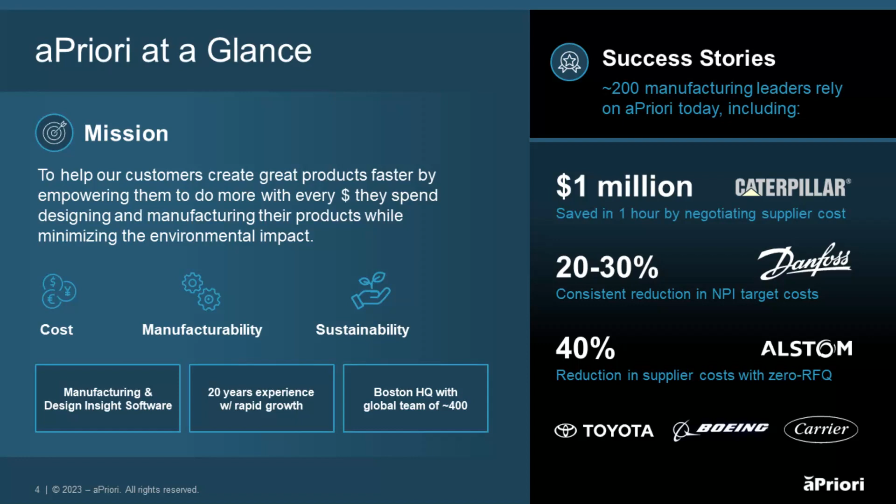We've got some great success stories. Over 200 of the leaders in manufacturing rely on aPriori today. Some examples on the screen: Caterpillar managed to save over $1 million in 1 hour. Danfoss saved 20 to 30% consistently with new product introduction target costs. Alstom managed to save 40% through reduction in supplier costs through their zero RFQ initiative. And many other customers from many other industries also rely on aPriori today. You can see we really do support all industries, and we've got some really big name customers in each industry that rely on aPriori to accelerate their business globally.

So what are the challenges? What are the priorities in industrial manufacturing today? Well, inflation and margin pressure—more recently that's been a hot topic. That's something that you can definitely help with aPriori. Mitigating supply chain risk with lots of disruption over the last couple of years—that's something that we can definitely address. Labor and skills gaps, that's always been a challenge in the engineering and manufacturing space, probably for the last 10 plus years. A lot of people are coming out of school and university ill-equipped for what's needed in the industry. And more recently, driving sustainability action. A lot of companies have made promises, but getting to that action is definitely a challenge.

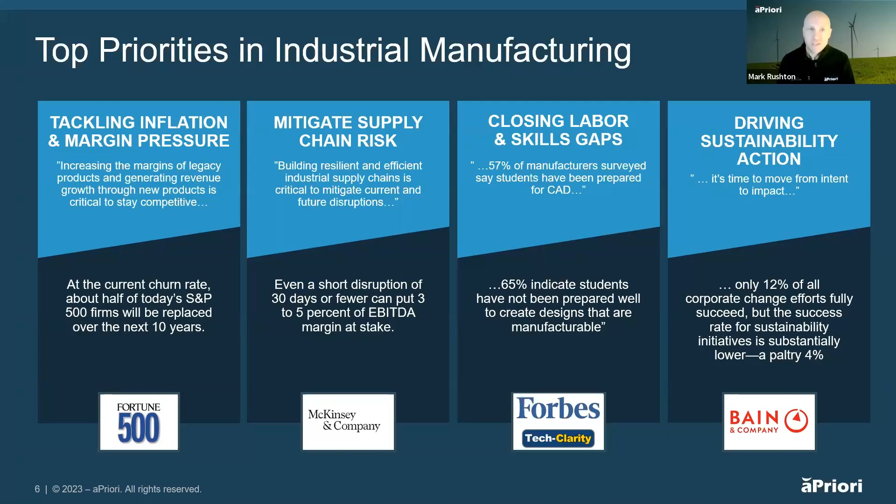So how do we help with that? Well, all of the investments that you've already made in things like 3D CAD and PLM, we leverage those. We leverage the value that's locked away inside your digital twin by adding to it and giving you a continuous digital thread. Many companies focus on the digital twin of the product, which is great, but we extend that by giving you a digital twin of the process and also of the factory. And we enable the insights trapped within that to be unlocked around cost, manufacturing, manufacturability, and now cost and CO₂.

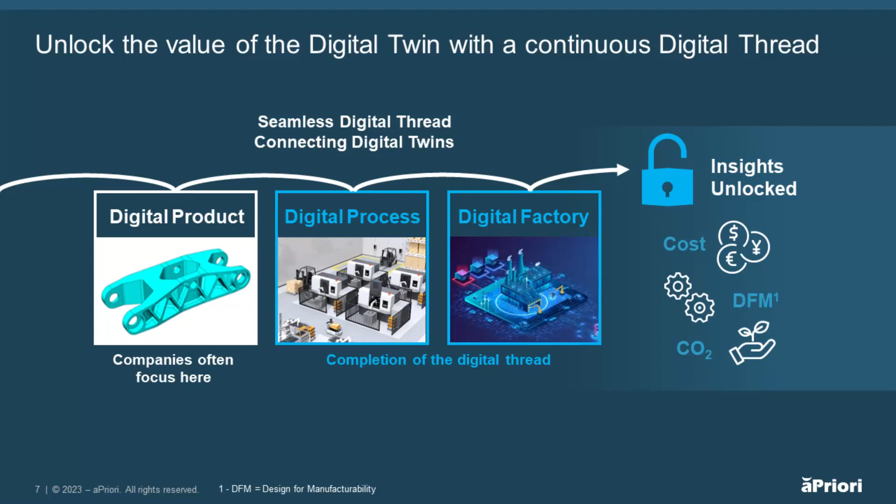So moving sustainability from intent to impact. Customers are demanding more sustainable products, and what's lacking is transparent data to prove it, to avoid greenwashing. There's immense pressure from new legislation and regulations like the EU taxonomy, and in the US, the proposals from the SEC. Even more recently, the carbon tax on imports proposed in the EU. The only other way to really do it is with complex, time-consuming and expensive full life cycle assessments. So we're here to help with all of these things.

Manufacturing companies have a huge impact on the world's energy consumption and global emissions. It's a big area where we can have a huge impact by driving efficiency and using our technology. Many companies, in some sectors 100%, have some sort of sustainability strategy defined. They've made promises publicly, but only 40% believe they actually have the knowledge and capabilities to achieve their targets, and we help bridge that gap.

We've been providing the ability to act on cost and manufacturability for over 20 years, so we really know product development and manufacturing very well. We're simply layering on top the ability to act on sustainability by taking what we know about manufacturing and allowing measurement of the carbon footprint of materials and processes used in the products our customers design and build. And with that, I'm going to hand over to Gibson to talk about how we do that for sustainability.

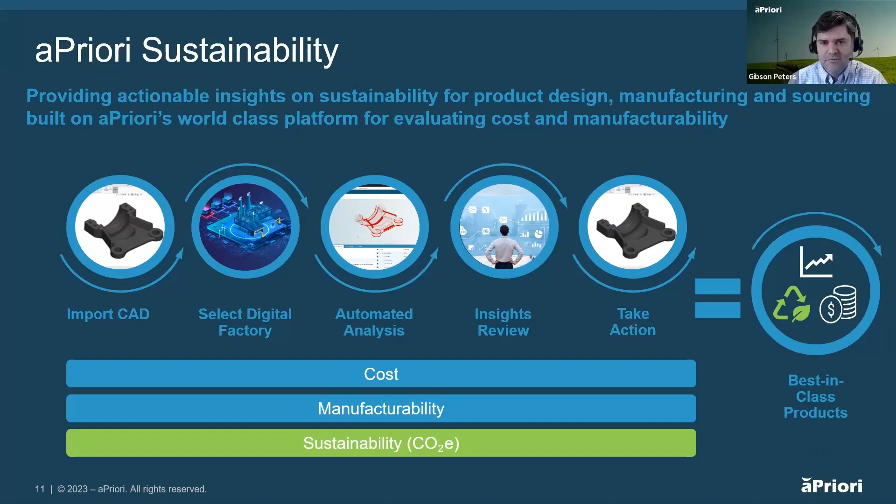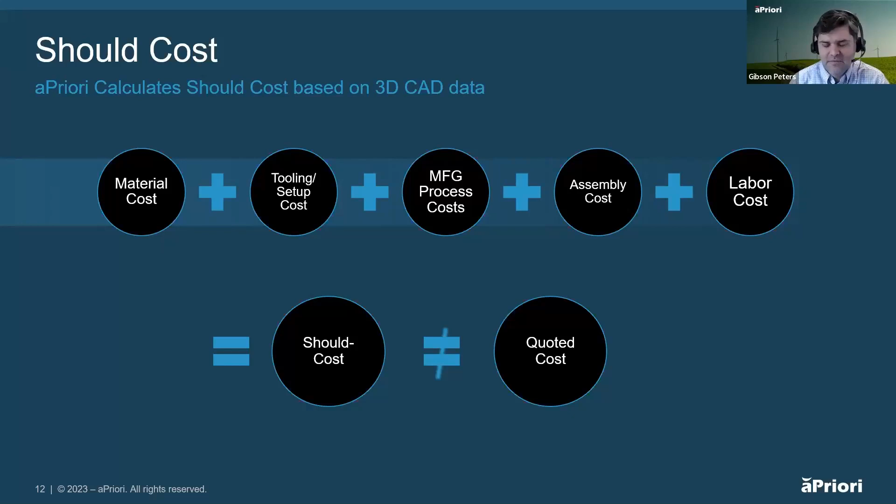For those not familiar, aPriori really focuses on should costing. We take the material costs, tooling setup, manufacturing process, assembly costs, and labor costs, and help determine a should cost, which is slightly different than a quote cost - should costing, as it sounds, is how much a product should cost to make. This really fits nicely into the demands of what sustainability is asking from our customers.

So for material costs, we understand rough mass, regrind, remelt, and utilization. We multiply that by the material CO2 factor to help you get a material CO2 calculation for your product. When it comes to the manufacturing process, we've spent a lot of time understanding the cycle time of many different products and processes - over 440 different processes developed - understanding the energy use for different machines, then layering on the electricity mix factor to multiply by the energy used to come up with a process CO2.

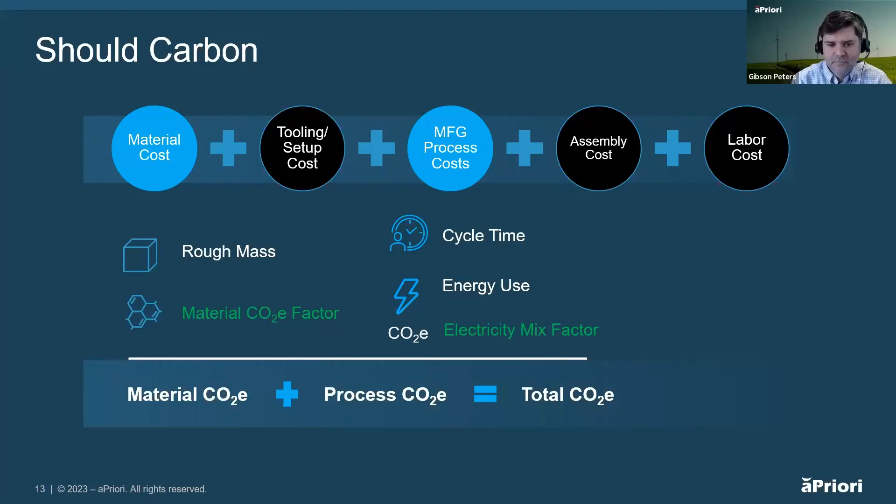What we found throughout our process is there's four main layers. What is the shape and geometry of the product? What is it made out of - the material? How it's made - the manufacturing process. And where it's made - the location, electricity mix. I think more and more as we dive into this and learn about sustainability and how we make products more sustainable and design them to be more sustainable, these are really dependent on each other.

So if I change the geometry and the shape, I can look at changing the material, look at changing the manufacturing process. So understanding how these different variables are dependent on each other is really important to understanding both the cost and sustainability impact, and helping you optimize for both cost and sustainability.

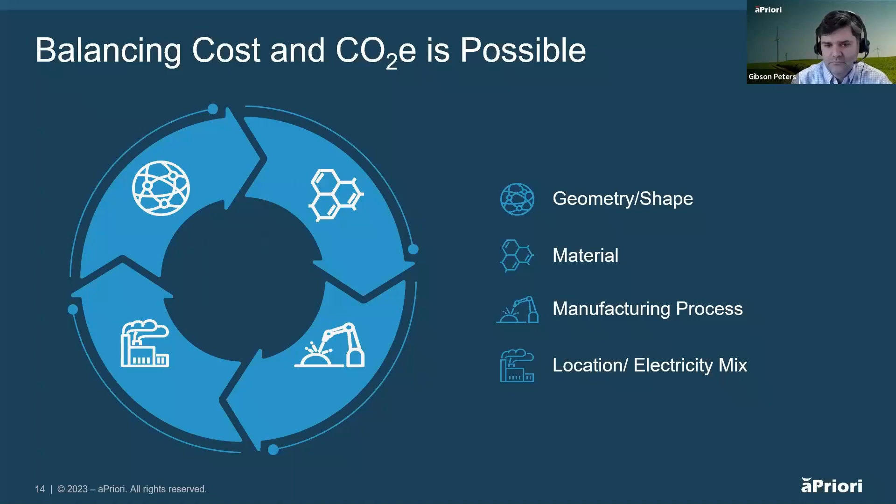Just to give an overview of what some of our customers are doing - working with a global truck manufacturer, they're helping, I think everybody starts with creating that baseline of existing products: how much carbon is in my existing products? Then looking for ways to reduce the CO2 in their products. This customer is looking at reducing CO2 by switching from metal components to plastic components, and it's the first solution they've really seen that can help them meet their ambitious CO2 goals.

Another customer of ours is also looking to automate the creation of CO2 baselines with existing products, equipping their design teams with insights when they start talking about circularity design or how to make products more sustainable. Finally, we're working with a manufacturer of aluminum products, and they're using aPriori as a sales tool to help customers understand the carbon impacts of using recycled material or materials with a lower carbon footprint. There's a lot of different ways we've seen customers utilize our product, and it's really exciting to see ways we initially thought of and our customers running with the insights we're able to provide.

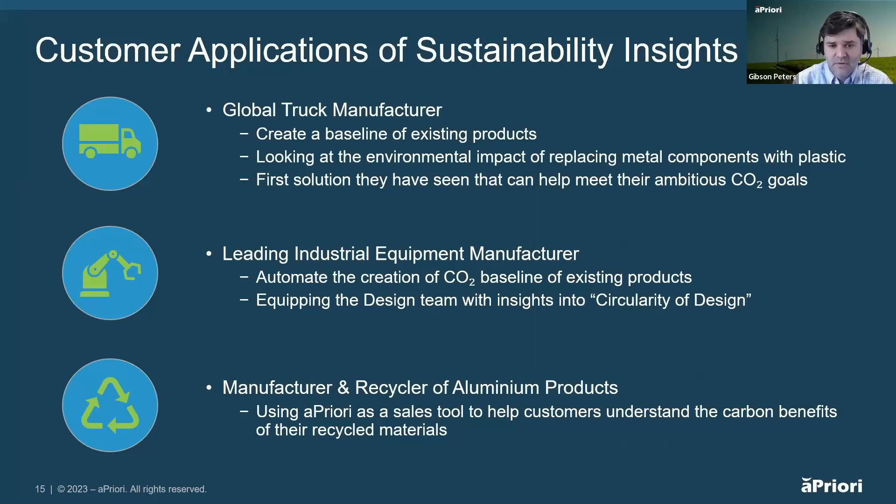And then finally, what we wanted to talk about is earlier this month, we had a chance to catch up with Tony Rasmussen, Global Manager of Cost and Value for Grundfos.

So let's walk through a live demonstration now. What I'll do is we'll go through and evaluate an injection molded design. I'll evaluate that in aPriori, and we're going to assess alternative suppliers, consider different materials, and compare design iterations as well. So when we evaluate a design, we're going to look at manufacturability, cost, and sustainability in parallel. Let's switch over to aPriori now.

Now that we're in aPriori, there are only a few main inputs for running an analysis, whether it's sustainability, cost, or manufacturability. Here we've pointed to the CAD file we'd like to evaluate. We need to just answer those 4 basic questions you may be familiar with. What's your primary method of manufacturing?

In this case, plastic molding. Where would you like to manufacture this? We're going to look at this in the USA. What material and what annual volume? At this point, aPriori will run through an analysis based off of those 4 primary inputs.

We also have the ability, as usual, to see manufacturing issues, whether it's draft angle issues, whether it's hole proximity, whether it's minimum wall thickness. All of this remains the same, whether we're running an analysis looking at cost, sustainability, or manufacturability.

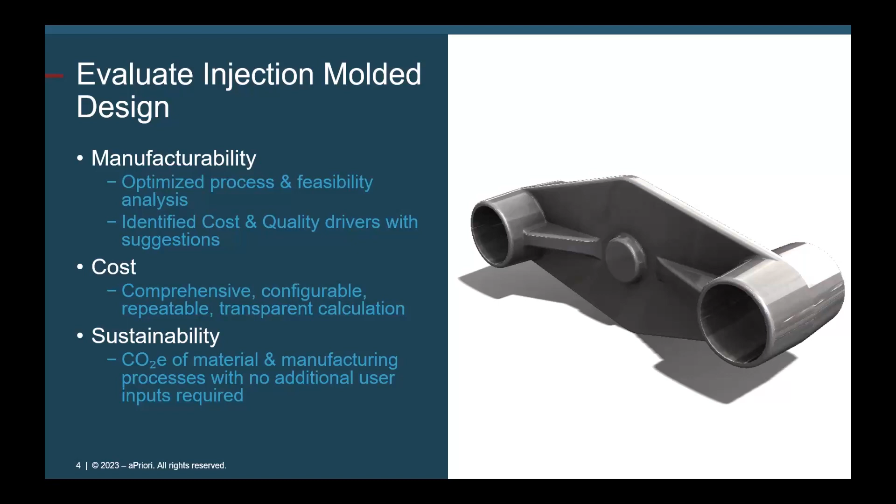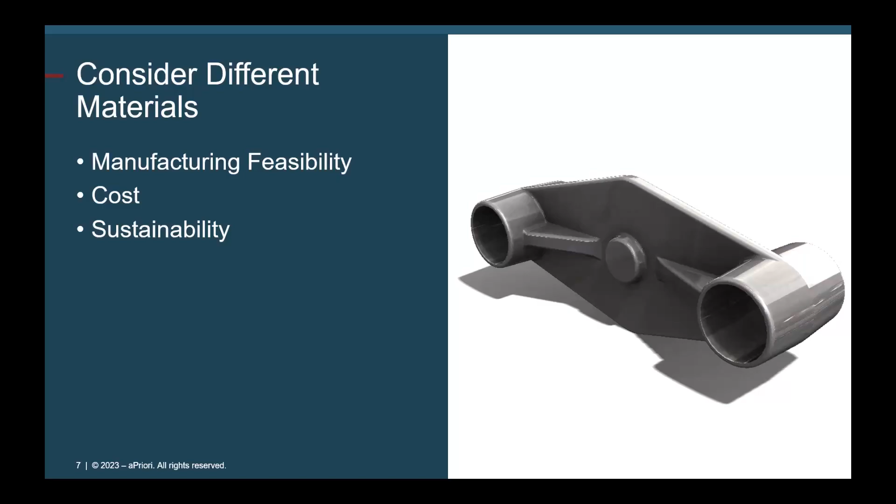So now let's go through and look at different materials and see what that does to manufacturing feasibility, cost, and sustainability. Let's come over to our sustainability guidance and look at our material. Here we can see in the US right now, about 60% of our overall CO2 is coming from that material, about 40% is coming from the processing. So let's go through and actually look at some different materials.

So we have it costed with ABS currently. Let's open it up and look at all materials. Now we have the ability to sort based off of the carbon of the material, the emissions factor, as well as the cost per volume. So we can actually go through and really understand what would give us a reduction in carbon. Sorting from that lowest carbon to the top, we have that ability to see what's the emissions factor of those different materials. Here we're looking at our ABS, we're at 0.47 for carbon. We have the ability to sort and see what those different materials are.

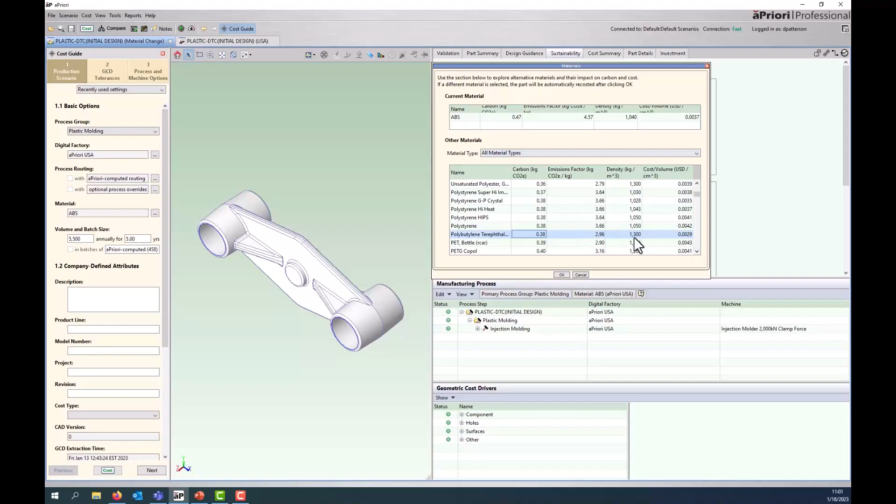So let's find a similar material. For example, here we have a PBT material. It's going to be a similar density, a little bit higher. The cost per volume is going to be a little bit lower. Let's run it with this PBT material and see what that does to our overall carbon. So we were at 1.01 kilograms of carbon. Let's rerun that and see what that does.

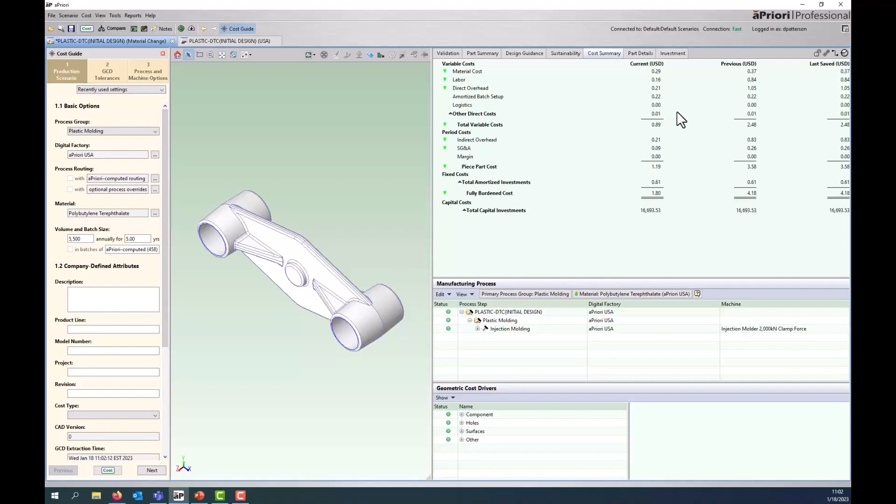So moving to that PBT material had a large reduction in the overall total carbon. We went from 1.01 to 0.58, so almost cut the carbon in half. But let's come over and look at cost. And cost went the correct direction as well. We went from $4.18 down to $1.80. We had a reduction in material, labor, and overhead based off of this new material. So we'll do that bottoms-up analysis to understand the cycle time associated with processing that specific material.

So we've just touched on manufacturability, cost, and sustainability, looking at different materials. You can go through and cost a material individually, or you can tell aPriori to go off and cost the part with all of your materials and come back with that lowest cost feasible material, all the while calculating sustainability, so you can understand the impacts of material change on manufacturability, cost, and sustainability.

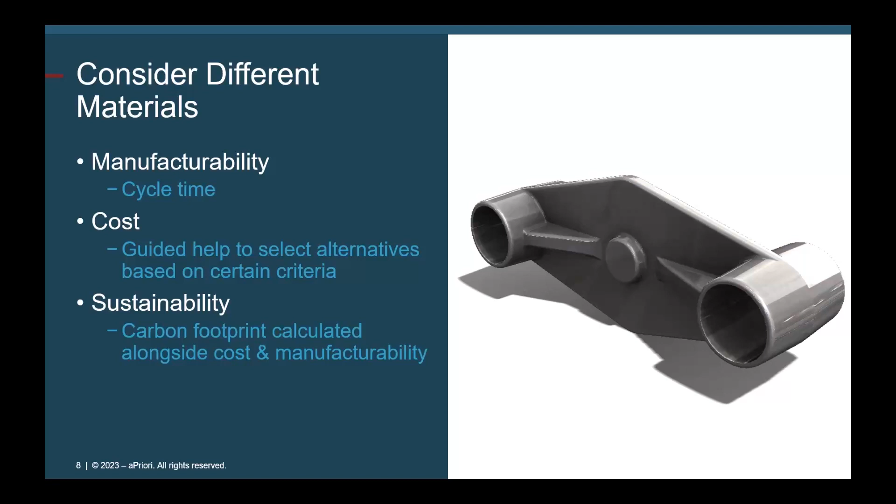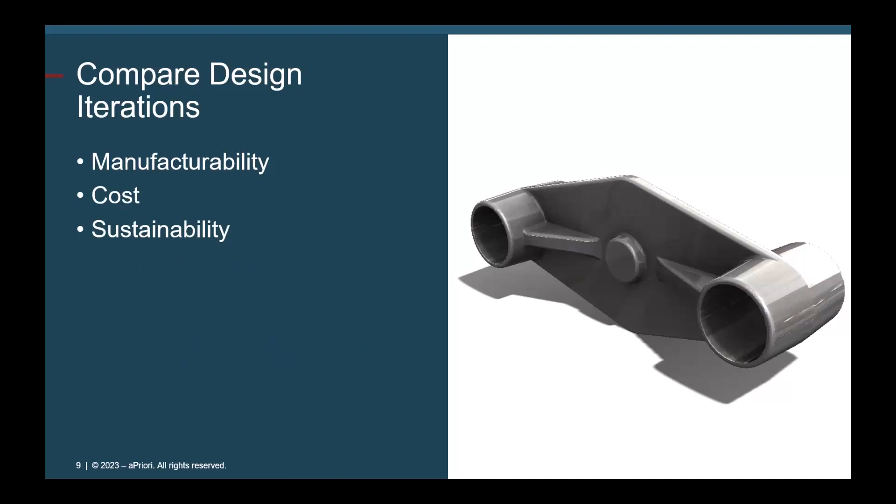So let's take this design now and do some iterations on the design itself so we can compare those different design iterations and look at manufacturability, cost, and sustainability for different versions of this design, leveraging the feedback from aPriori.

So let's dive back into our design and focus on understanding the manufacturability, cost, and sustainability by looking at some design iterations. Let's dive into our design guidance and look at our potential manufacturing issues.

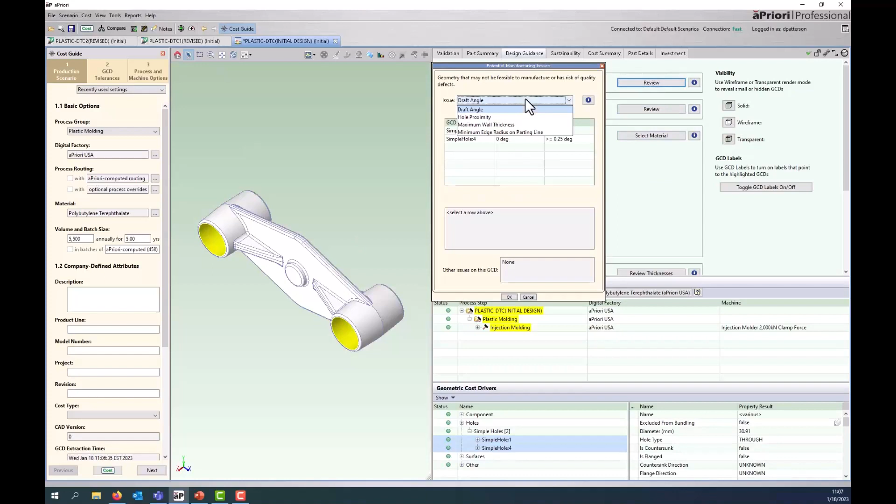If we come over here, we can see our list of potential manufacturing issues - draft angle issues, hole proximity - but let's focus on this maximum wall thickness. With this current design, we've calculated a maximum wall thickness of 16.5 millimeters, which is greater than the 3.1 recommended for this material.

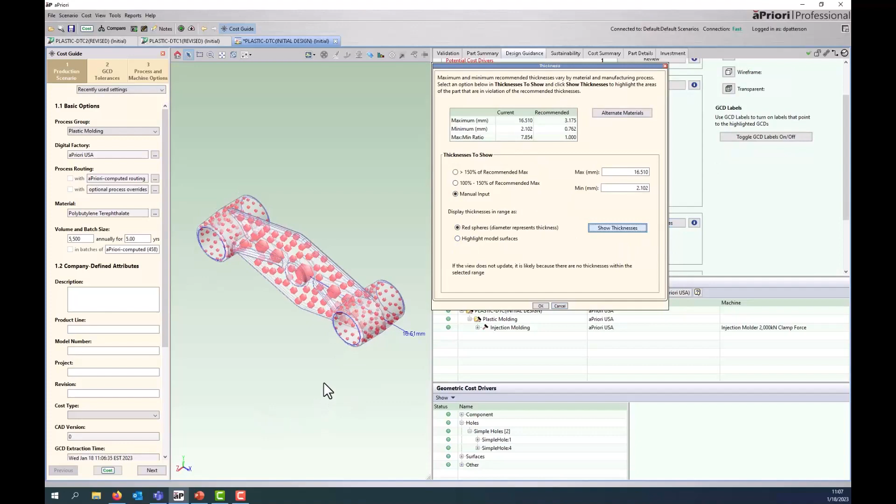Let's dive in and see specifically where on that model that material issue is. Let's go into our transparent mode, and we can highlight that specific area where there's a thickness violation. Right in the middle is our biggest thickness violation on that boss, as well as the ribs on the side having some thickness violations.

Let's fast forward and look at a different design version of this. Let's go through and remove some of that thickness and see what we can do for a different design here. So here I've got my revised design, taking that material and coring out some of the material in those thickest spots.

Let's see where we are cost-wise. Right now we're at $1.70 for this design with $24,000 of tooling. Let's look at where we are with our original - we were at $1.80 with about almost $17,000 of tooling. So we've reduced the cost a little bit.

Let's see what that does to our overall sustainability. Here we're at 0.58 kilograms of carbon for the original. Let's look at this with our revised design - 0.43, so we're moving the right direction.

That material wall thickness has a large implication on the cooling time of the design - the thicker the material, the longer it takes to cool. With our design, we've added some additional tooling to the part, resulting in 4 lifters for this cutout material. That's reflected in that tooling charge, the $24,000 instead of that $16,000.

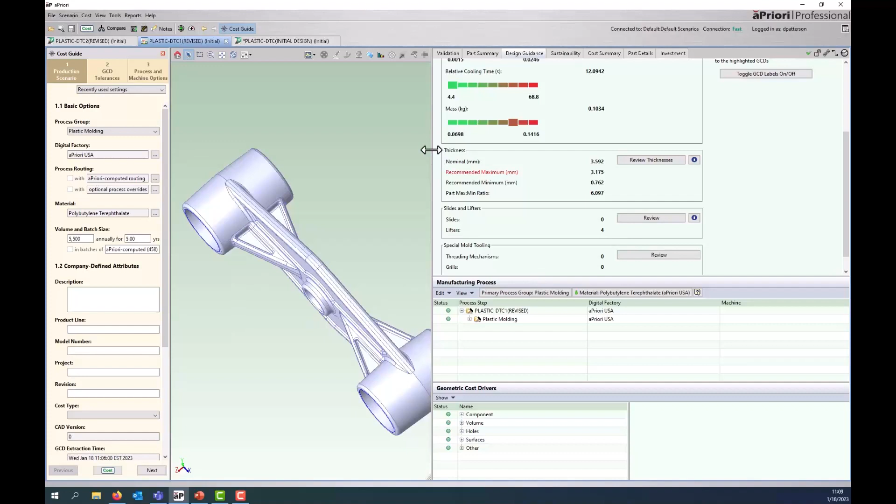Let's fast forward one more time and look at what would happen if we were to eliminate those side actions, going from 1 thick rib on each side to 2 thinner ribs, eliminating all that action.

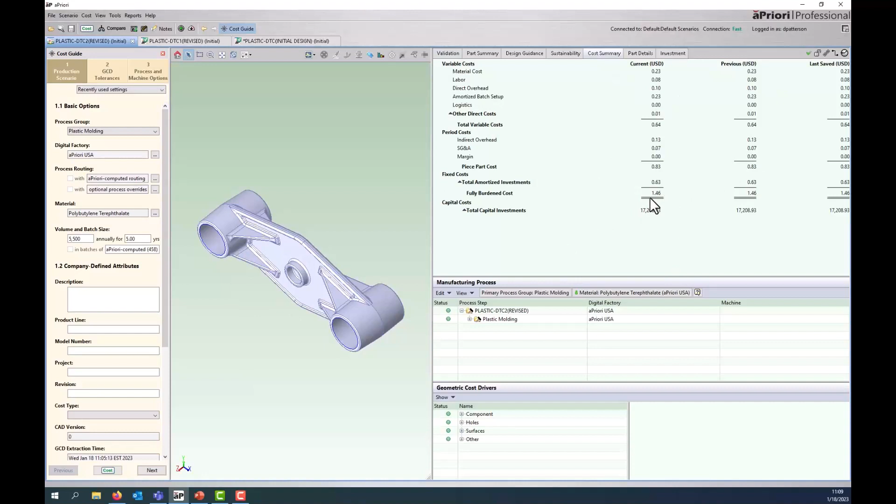Let's see where we are cost-wise. Right now we're moving the correct direction - we went from $1.80 to $1.70, now down to $1.46. We dropped our tooling charge closer to that original charge of $16,000.

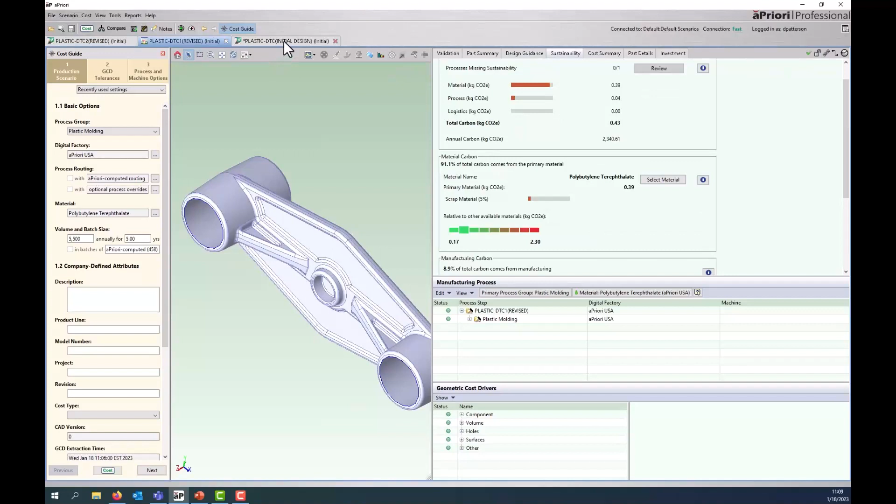Let's see where we are on sustainability. That moved the right direction as well, 0.38 kilograms of carbon overall. If we look back at that second design, it was 0.43, and then looking at the original, 0.58. So we've moved the correct direction by minimizing the thickness of the part based off of the design guidance.

So here we have the ability to optimize for manufacturability, cost, and sustainability in parallel. Based off of changing that design, we were able to reduce the cycle time, which led to a reduction in cost as well as a reduction in CO2. Reducing that material can have a very large impact on all three of these.

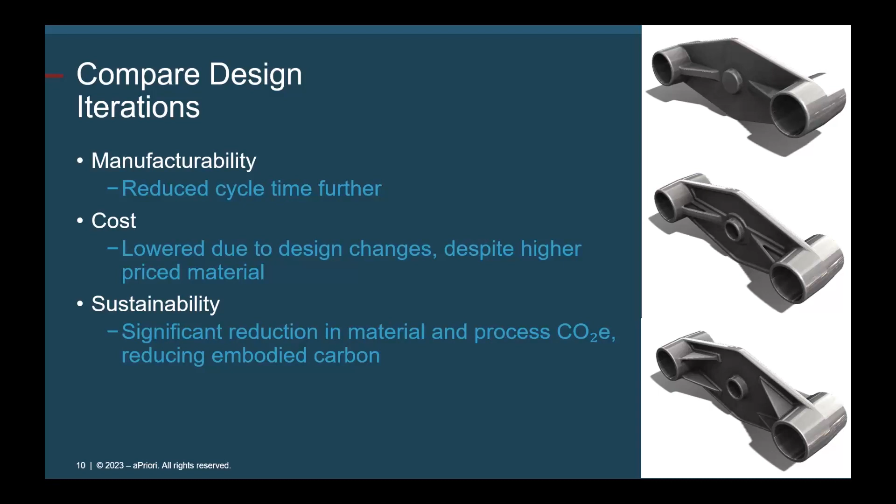In summary, we've evaluated an injection molded design. We've looked at potential quality issues, cost driving issues, as well as assessed alternative suppliers and alternative materials. We further refined our design by looking at design iterations to maximize the design based off of feedback from aPriori.

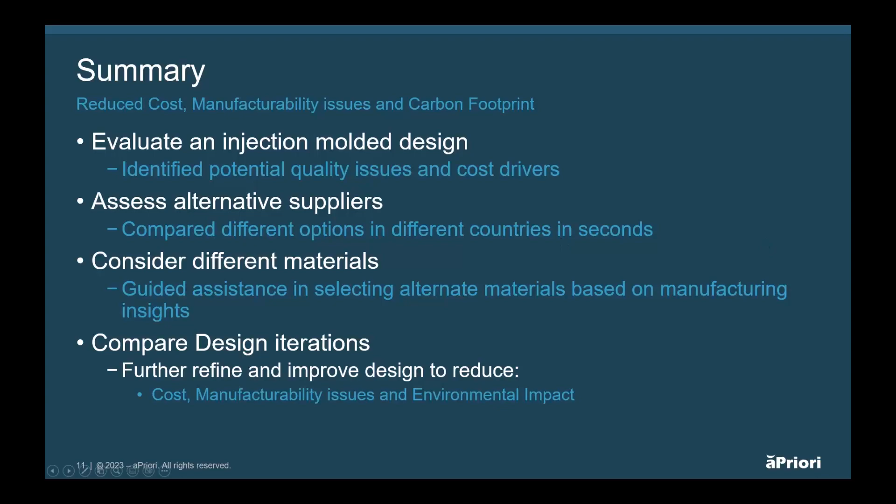Thanks, Daniel. Great job there. Really, really good overview of what's possible.

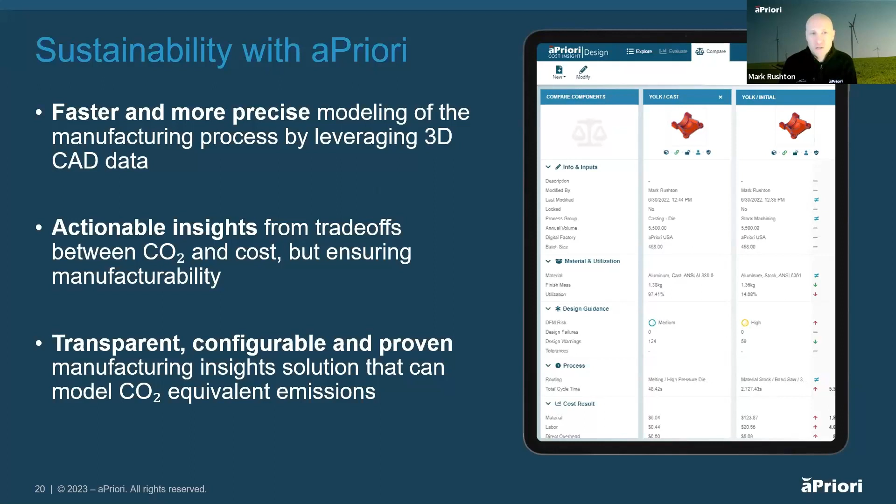Hopefully you saw from Gibson's overview of the product and Daniel's demonstration that sustainability with aPriori is really going to help you achieve your goals faster with more precise modeling of the manufacturing process by leveraging that 3D CAD data or digital twin. It goes beyond just baselining and reporting - it gives you actionable insights from being able to do trade-off analysis between cost and CO2 across different processes and designs. The key is really giving you transparent and configurable, proven manufacturing insights that leverage our knowledge of the manufacturing process and give you CO2 equivalent emissions from that process.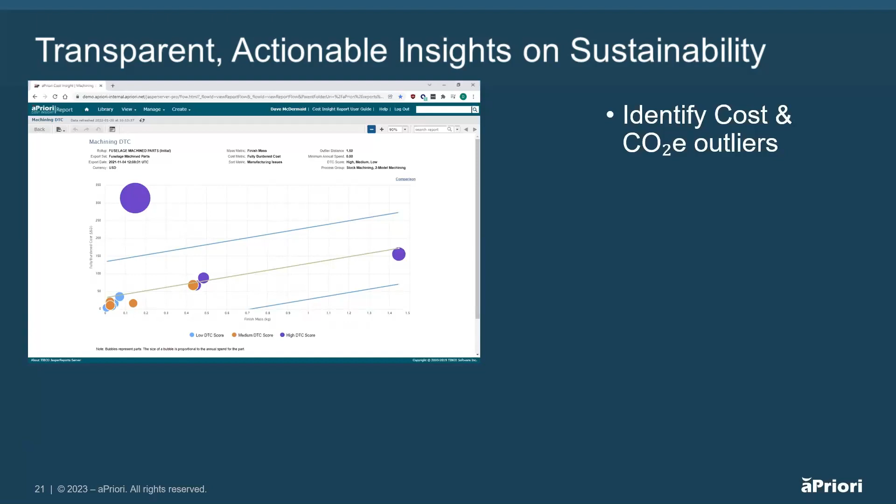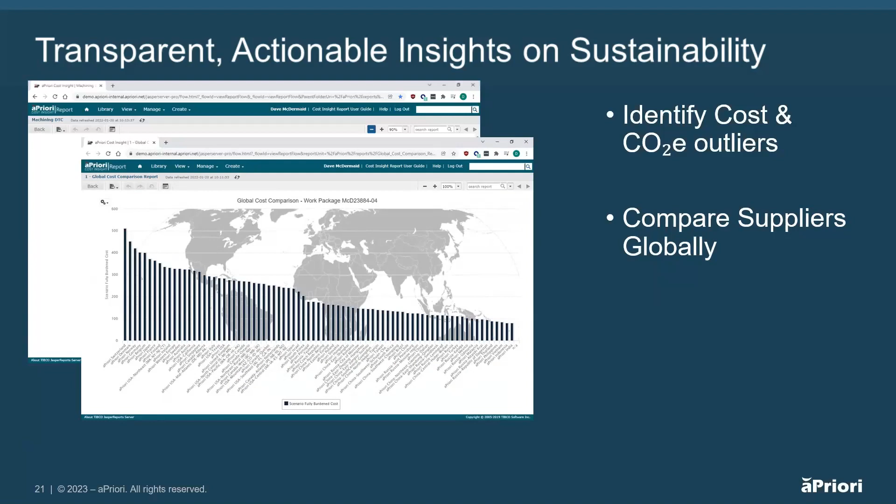As I mentioned, the transparent and actionable insights on sustainability can be used either interactively on component and assembly level, like Daniel showed in the demonstration, but using our analytics built into the platform, it can help you identify outliers for both cost and CO2 emissions. Not only cost varies based on where you're manufacturing globally, but also the CO2 emissions. And that's something you can look at a high level as well. But really the key is to enable access to carbon data at a product level, which is quite unique in this space.

So hopefully you can see how we can really help move you from intent to impact, and that as you saw with the interview with Tony and quotes from Tristan at Carrier, you can join others that are already leading the way. You can start to address how customers are demanding more sustainable products by providing transparent, precise carbon data and win more business from having that. You'll be able to get ahead of upcoming regulations and avoid inevitable penalties, and save time and cost by engineering out carbon earlier in the process rather than trying to do it once everything's finalized.